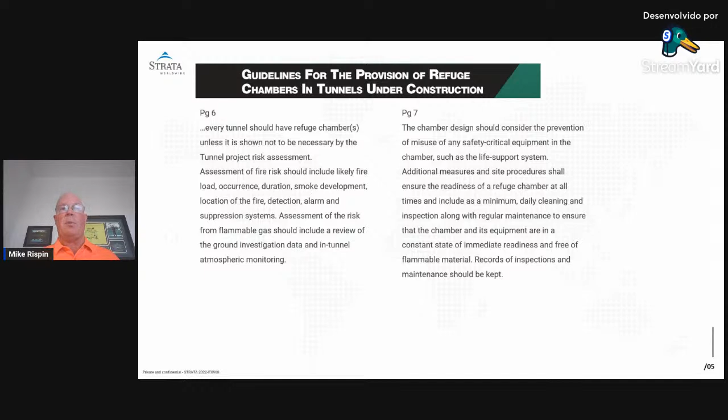And as I mentioned, we can manufacture them to various configurations. They can sit on the tunnel floor. They can go on rails, which I'll talk a little bit more about later. They can be built into the gantry of the tunnel boring machines. We have flexibility.

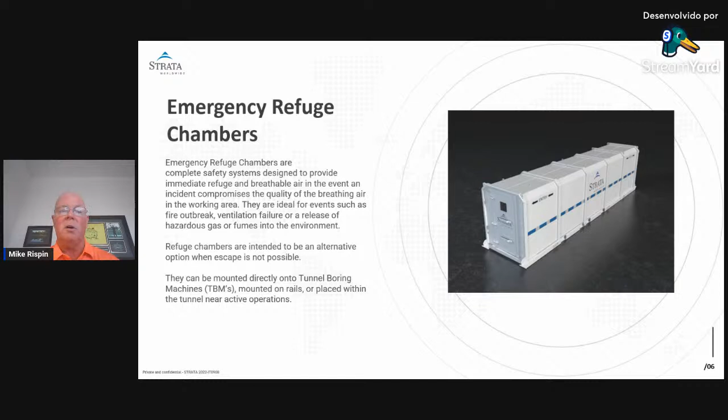And they should always have an escape hatch so that if for some reason the main entry/exit gets blocked or somehow becomes inoperable, there is an escape hatch for people to come out when the time is right. You can put an airlock entrance with or without purge air into it. We can make them mobile by putting hitches and wheels on them.

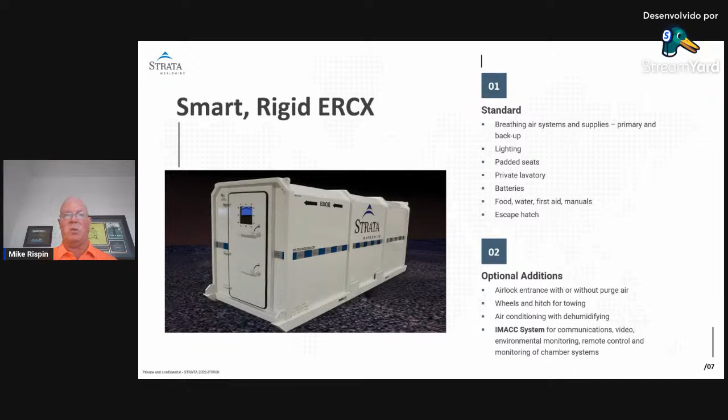There's air conditioning with the dehumidifying available. And there's also smart connected systems that I'll talk a little bit more about in a couple of slides.

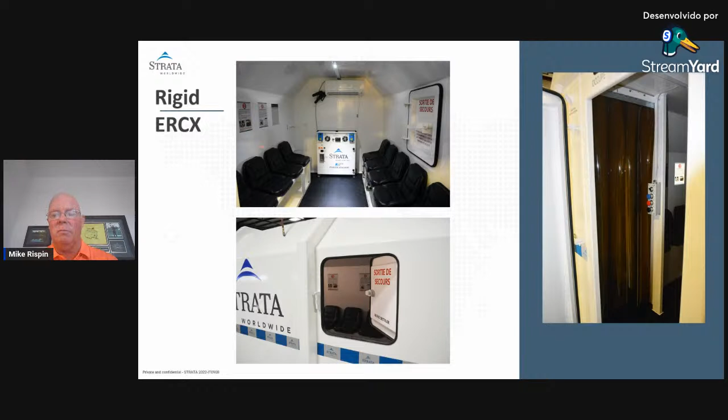So when I talked about refuge chambers today being smart and connected, they're equipped with a system like our IMACC system, which is intelligent monitoring, alert, communication, and control. This allows you to have live communication to surface, either wired or wireless, video so that people on the surface can see inside the chamber, atmospheric monitoring with alarms to tell you if the air quality is getting out of standard, monitoring of the battery voltage, and also data and history logging.

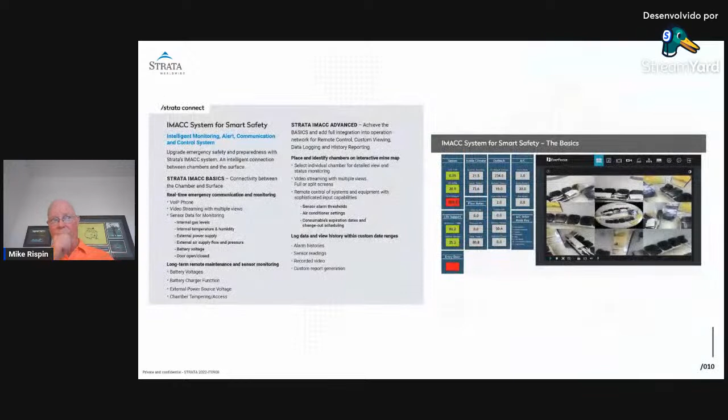So in the old days when these first came out, you went into them and you just waited and waited and waited until somebody could come and rescue you. Here you have access to more information. This just gives you a little bit more detail of what I was talking about, and also shows you what the continuous digital connected readout might look like on the right-hand side.

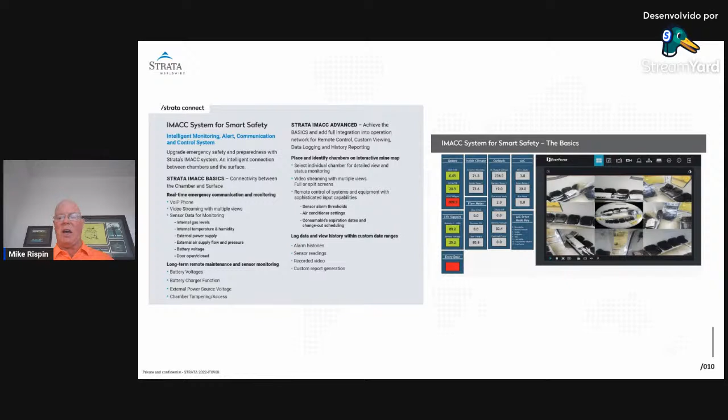So now I'm going to shift away to one of three other options for refuge chambers. And in this case, we're going to talk about an inflatable refuge chamber, which is partially rigid, but has a tent that inflates when you need it. We call these fresh air bays. They are air powered, absolutely standalone. You could drop them in an offshoot of the tunnel and they'd be there and ready for deployment when you need them. And they provide the same clean, breathable air in emergency situations that a rigid refuge chamber would.

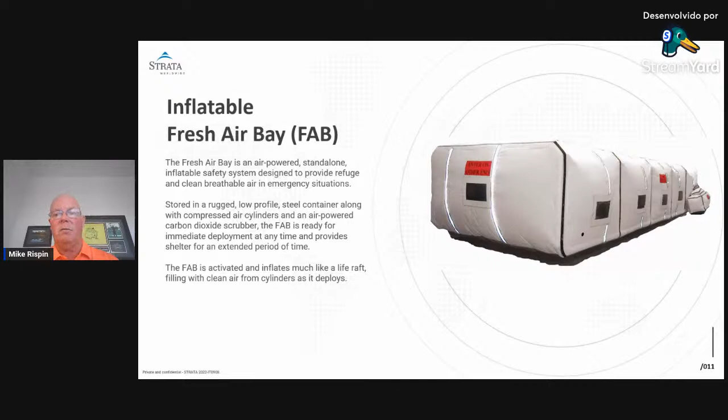They're stored in a rugged, low-profile steel container. I'll show you a picture in a subsequent slide. And you don't just walk into them, but they're ready to be deployed within 3 to 7 minutes when you need them, much like a life raft, from the clean air cylinders that are incorporated within the shell.

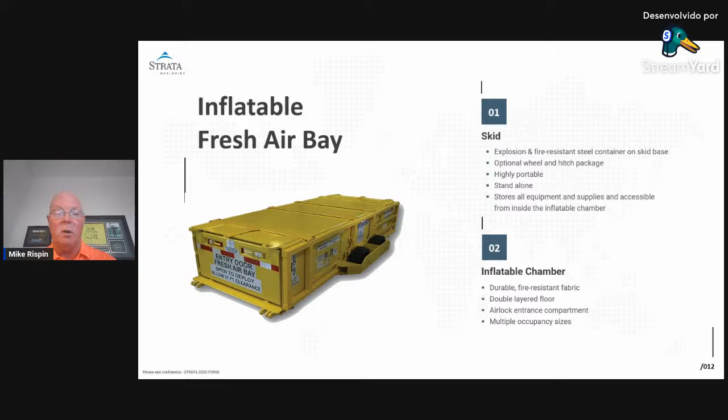Then once you inflate it, the tent is made of a durable fire-resistant fabric. It's got a double-layered floor. So while it doesn't have seats in it like the rigid one, it still provides plenty of room for people to be comfortable sitting and lying on the floor. And it does have an airlock entrance compartment. The largest one that we've ever designed accommodates up to 48 people, which, if you think about it, is much more manageable in an inflatable configuration like this than it would be in a rigid one.

I'm going to play a short video here, and you'll see how it deploys.

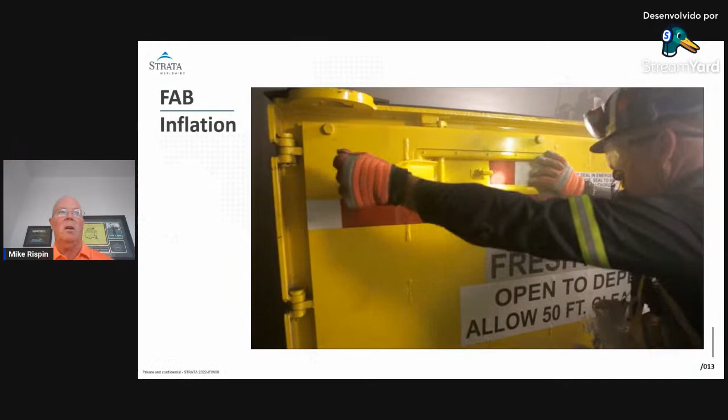And Daniela, can you confirm for me that you can hear the audio? Yes, we can hear. Obrigado. Okay.

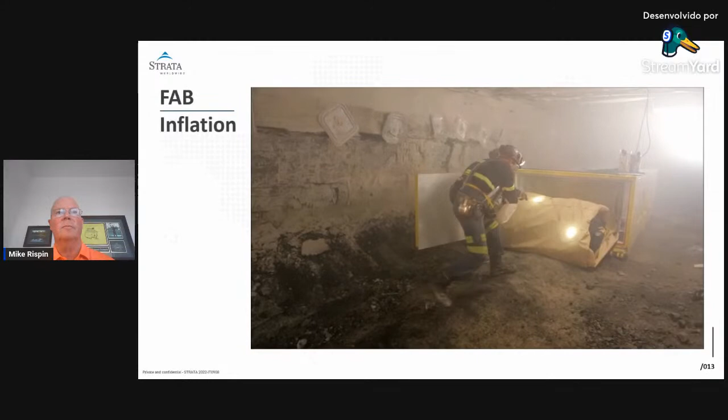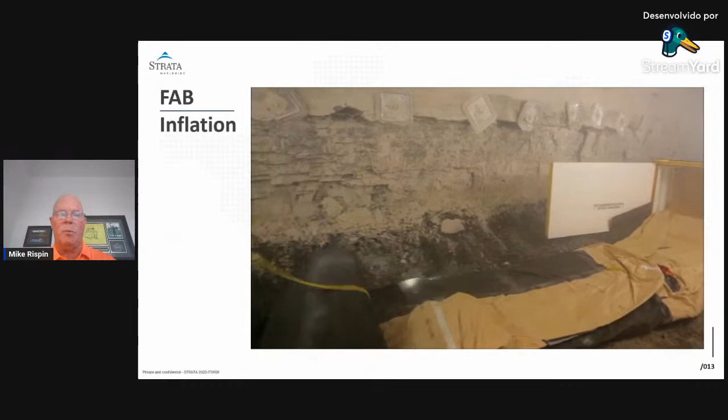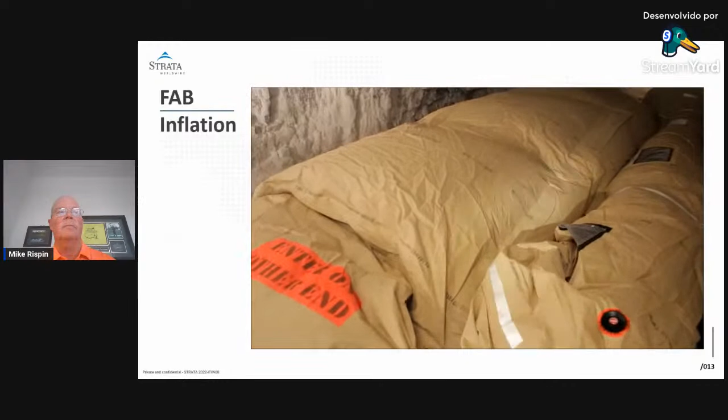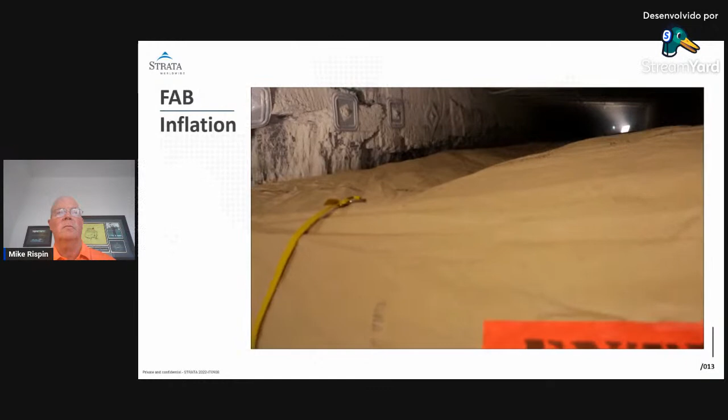I'll point out here that even though there are 2 people, every one of these fresh air bays is designed to be deployed by 1 person only. And there you can see it fully deployed.

Now, one thing that both of these systems have in common, rigid and inflatable, is that they do have the breathing air system, which is incorporating an air-powered carbon dioxide scrubber, which uses high pressure compressed air cylinders and soda lime cartridges to remove the carbon dioxide from the exhaled air. Both have a built-in fan system, which circulates the air through the scrubber and the chemicals, and you have oxygen replenishment inside the safe environment from cylinders as needed, as regulated by a flow rate meter.

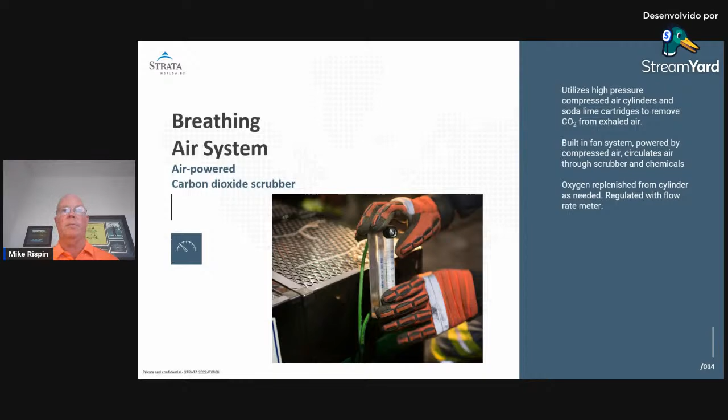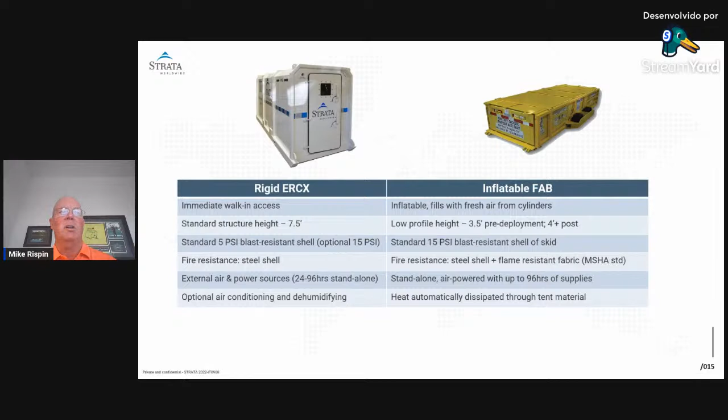So as we introduce this new technology to the tunneling industry, we often get asked what are the similarities or dissimilarities between the two. And you can see here the differences between the two. And I'll just point out a couple of points because you can read them, but one advantage of the fresh air bay is that it has a low profile height until it's deployed versus the standard structure.

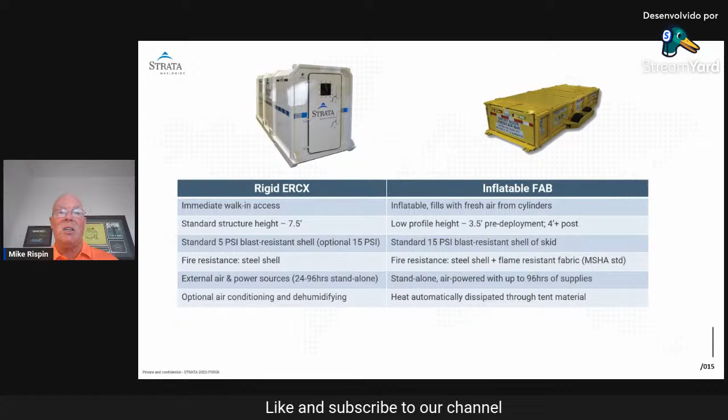You still get blast resistance from the shell of the skid. You still get fire resistance from both, and you still get 24 to 96 hours of safety in these chambers. And the reason we have a broad range like that is that in most cases, underground mining legislation or companies will call for 72 to 96 hours, whereas the standard in tunneling through the ITA guideline is 24 hours.

So now I'm going to go to a third option that you may have, and this is a micro fresh air bay inflatable chamber. And it's similar in concept to the FAB, but it's not self-contained. For this, you must have an attachment to an external compressed air supply at all times, because that supply is going to inflate the tent and keep it inflated and keep the fresh air circulating to the occupants.

It comes in a small steel case that you see up there on the left, probably about 1.5 meters high, 0.5 meter deep, and maybe 0.5 meter wide. It can be wheeled around by 1 person. It offers a 3-stage breathing air filtration system, and it purifies the air before it goes into the chamber.

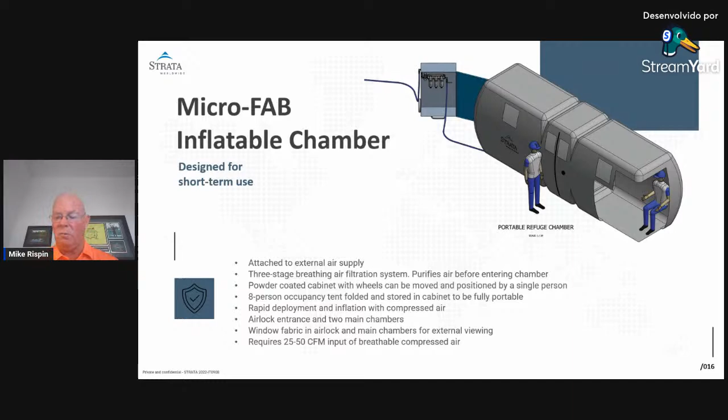This micro fresh air bay is designed to accommodate 8 people comfortably, but really in a pinch can accommodate up to 10 people. The window fabric in the airlock allows you to look outside, and that compressed air that you need is between 25 to 50 cubic feet per minute to use it. As I mentioned, it's designed for short-term use. It's ideal in the event of equipment fires, which burn out relatively quickly. It shows you above that there are refuge areas on both sides, and you've got an airlock in the middle.

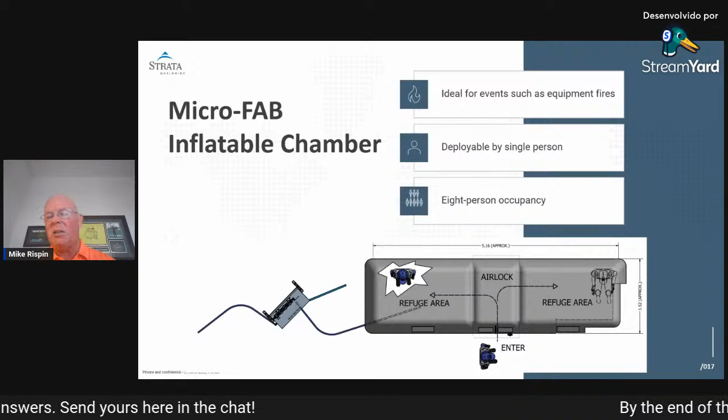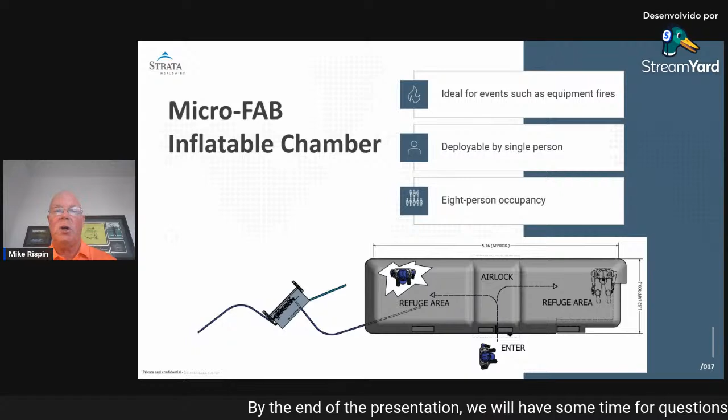Now, interestingly enough, I had the opportunity to present this new concept to the head of Working Group 5 globally, Mr. Donald Lamont. And after having a chance to have a look at it, he looked at me in the eye and he said, "You know what, Mike, this is better than nothing." And he didn't mean that in a bad way. He meant that in the sense that if you either won't or can't use a rigid or conventional fresh air bay, if your space is tight, you've got a confined area, something like this will do a better job of sustaining life than if you didn't have it. And so it's now being considered by Working Group 5.

Finally, coming to the fourth thing is the concept of a self-propelled refuge chamber. We're in the process of building the first one of these. They're rail mounted. We've partnered up with an international company called Mining Equipment Limited. And the idea in this case is that you have the same benefits of a rigid refuge chamber that you would have placed on the floor of the tunnel or on the gantry of the TBM. But in this case, instead of necessarily having to wait for people to come and get you, this allows you to either drive a group of people out of the tunnel yourselves or to drive into the tunnel to get people in a safe environment.

These are designed to be either battery or diesel powered, 16-person occupancy, and they offer all the other features of the rigid refuge chamber, including optionally air conditioning, the IMAX system connection via Wi-Fi. And if visibility is impeded, we can also put a proximity detection collision avoidance system on this rail-mounted refuge chamber.

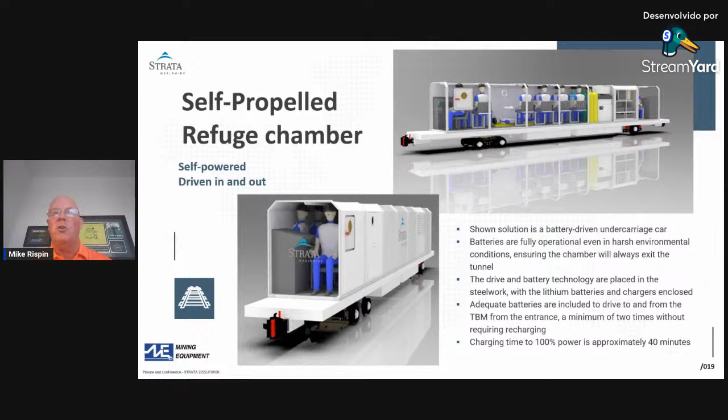So this just shows you a little bit more of a side mock-up of what it would look like. Up on the upper right-hand corner, this particular one is battery powered. You can see the batteries underneath the refuge chamber. Very compact. They stay out of the way. If you need to, we can build these again with diesel, but it does then either lengthen the car length you need to be able to accommodate the refuge chamber, or you go with a smaller one.

And these batteries are industrial for underground environments. They operate even in harsh environmental conditions, and their capacity is such that you can do 2 full trips in and out of the tunnel to the TBM from the entrance. And if you need to recharge them, it's about 40 minutes to get back to 100% power.

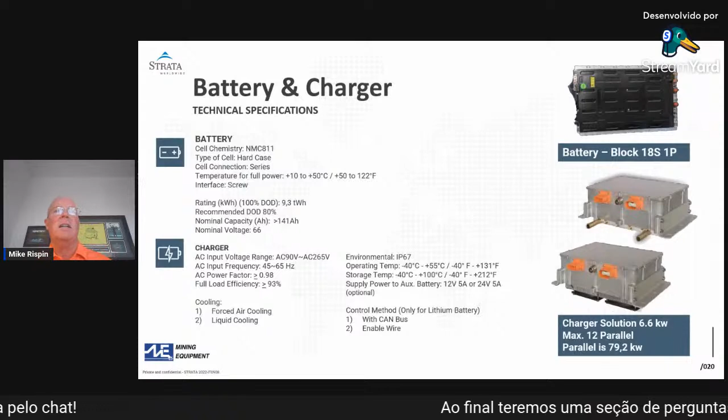So not to get into too much detail on these, but as I mentioned, they are commercially available, underground-rated industrial batteries that would power this.

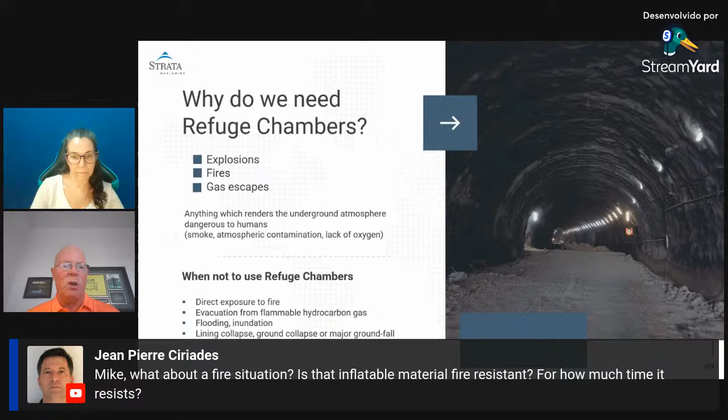Mike, what about a fire situation? Is that inflatable material fire resistant? How much time does it resist? Yeah, obrigado, Jean-Pierre. I don't have the stats right off the top of my head, but yes, it is fire resistant, and it has a maximum temperature and a maximum flame duration to which it can resist. And the only thing that I would add to that is that it is highly accepted in underground coal mining environments. And so we anticipate that it's going to be suitable for anything in a tunneling environment because it's designed for coal mining. Okay.

What about the chambers, for example, in a TBM like Istanbul, the crossing of the Istanbul Strait, where you had the intervention workers? Could you also use that, like the last example, to bring them in for the intervention, which was high pressure? I'm not so sure it would fit in the same way. I think not, because of the pressure. No, typically these aren't designed for hyperbaric interventions. They're not designed for that. They're a place for people to go and lie down, but that is not Strata's expertise. Hyperbaric chambers are done by other companies that service the tunnel projects. It wouldn't work.

And what's the current level of adoption of emergency refuge chambers globally? That's a very good question. It really depends on the culture, Daniela. If you go to Europe or most places in Asia, it's almost always having the refuge chambers in the bid documents for the construction of the tunnel. They're accepted in those markets, they're expected to be there, as I mentioned from the ITA guidelines, unless they're proven not to be needed, unless there are multiple egresses from the tunnels. Refuge chambers are part of that culture.

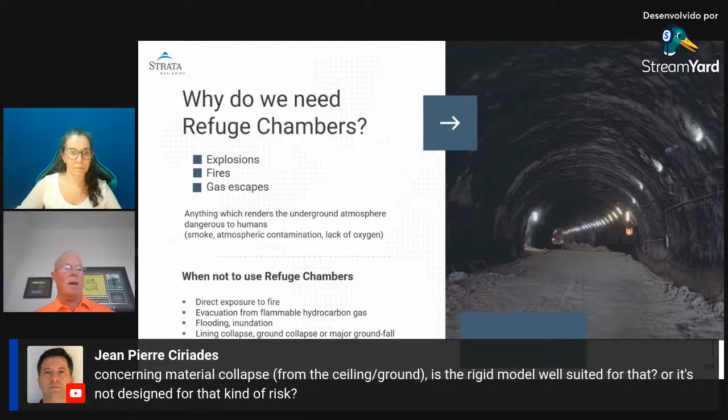Concerning material collapse from the ceiling ground, is the rigid model well suited for that, or is it not designed for that kind of risk? So as I mentioned early on in the presentation, and I think I'm actually showing that slide right now, it does have some structural integrity and structural resistance, but it is not designed to protect against lining collapse, ground collapse, or a major ground fall. It'll take some smaller material falling from the roof, perhaps material that comes through wire mesh, smaller blocks, but it's not designed to protect people in the event of ground collapse. It's really designed for providing a safe underground atmosphere.

Yeah, so it has to be placed in a kind of safe space inside the mine. Yes, as safe as any space can be. Like I said, it's manufactured of steel, so it does have some structural integrity, but it's not meant to hold up against a major ground failure. Yes, yes.

And then inside the refuge chambers, I know that you can leave some food and water as well, right? How does it work? We provide them with food and water supplies and toiletry supplies that are designed to accommodate the maximum number of people for which it's designed, for the design time of either 24, 72, or 96 hours.

Okay, and this timing depends on what? On the size or the type of the refuge chamber? For example, if it's 1 day or 72 hours, does it depend on the model or not necessarily? It really depends on the legislation, or on the judgment of the people that are operating that underground environment.

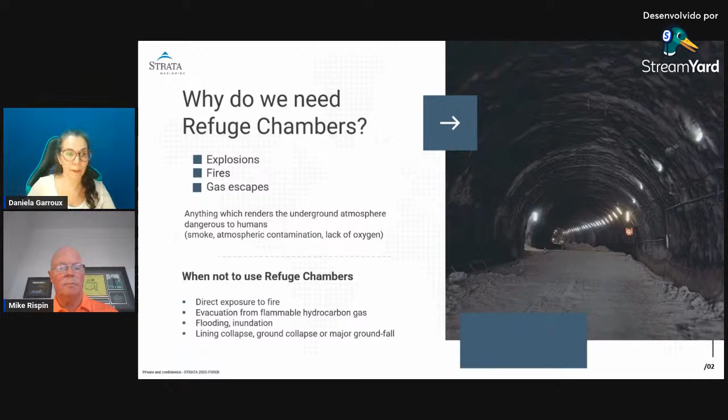Okay, I guess we don't have any more questions from what I've seen. We will have you again later to talk more about other subjects, right? I don't know if you want to add anything else about Strata or about the tunneling world in North America, in the United States, before I tell a little bit about our next webinars.

Daniela, you mentioned that I'm not only vice president of tunneling for Strata in my day job, but I'm also the current chairperson of the Underground Construction Association, which, like your committee in Brazil, is the member nation representative organization in the U.S. We really appreciate the opportunity to interface with other country organizations. I've known many of your members over the years, not the least of which is Tarcisio Celestino. And I look forward to rubbing elbows at any international opportunity, including the upcoming World Tunneling Congress in Athens in May. So thrilled to have this opportunity to talk about safety, which is a passion of mine and of the company.

Yes, I guess we have 72 days to go. I counted yesterday. 72 days. And how many hours? Oh, I didn't count that. Okay, all right, no problem.